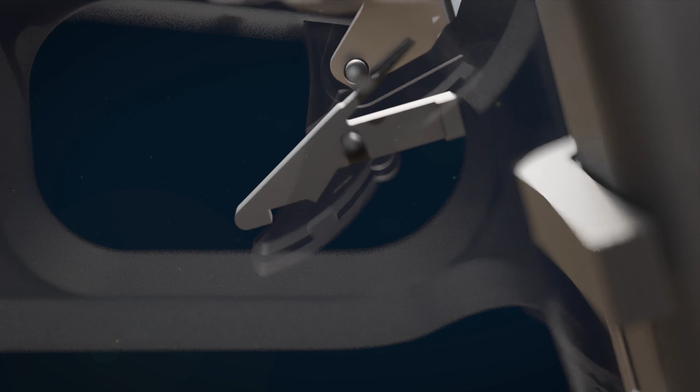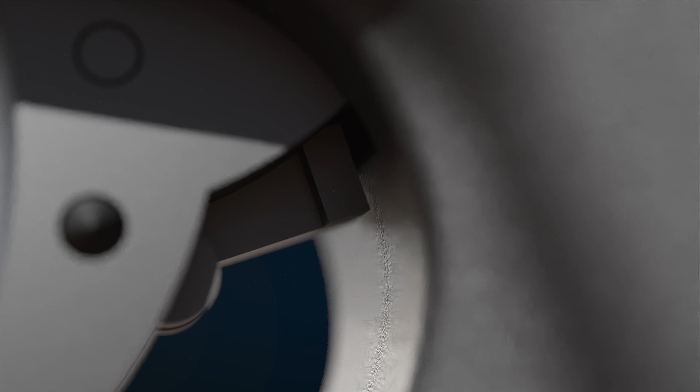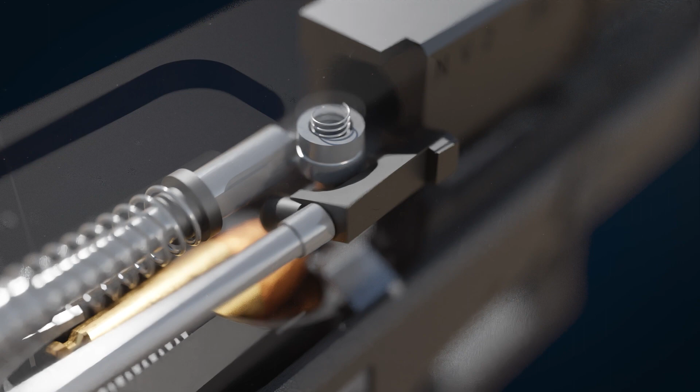Safety is paramount. The Glock features a trigger safety, a small lever incorporated into the trigger itself. This lever must be depressed to allow the trigger to move rearward, ensuring the trigger doesn't move without a deliberate finger push. Additionally, there's the firing pin safety. This is a solid pin that blocks the firing pin from moving forward. When the trigger is pulled, this safety is disengaged, allowing the firing pin to move.

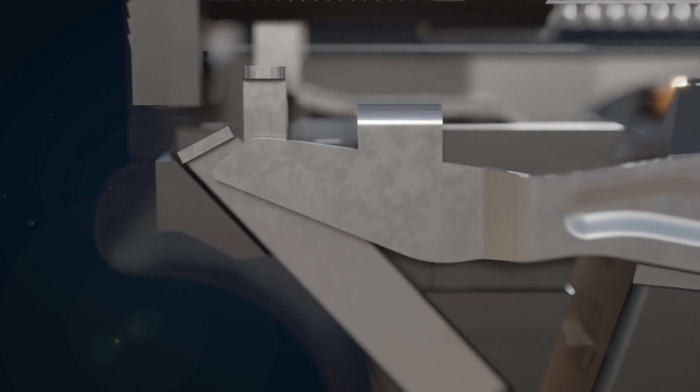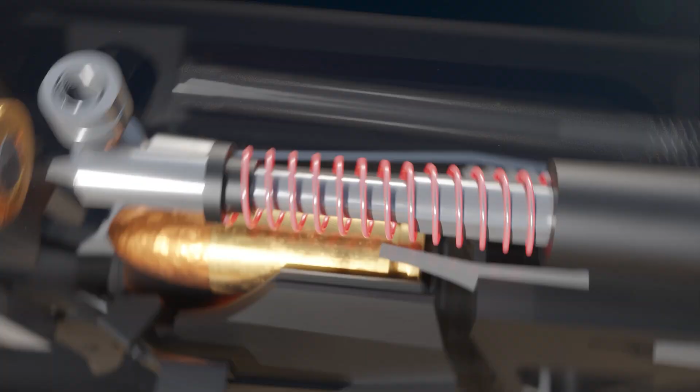The heart of the Glock's firing sequence lies in its trigger mechanism. As the trigger is pulled, the trigger bar, connected directly to the trigger, begins its journey. The trigger bar engages and pulls the firing pin backward, compressing the firing pin spring. As the trigger continues its rearward motion, the trigger bar is guided by the connector, causing it to cam downward, releasing the firing pin. With the trigger bar disengaged, the compressed firing pin spring releases its energy, propelling the firing pin forward. The firing pin makes contact with the primer, a chemically sensitive compound.

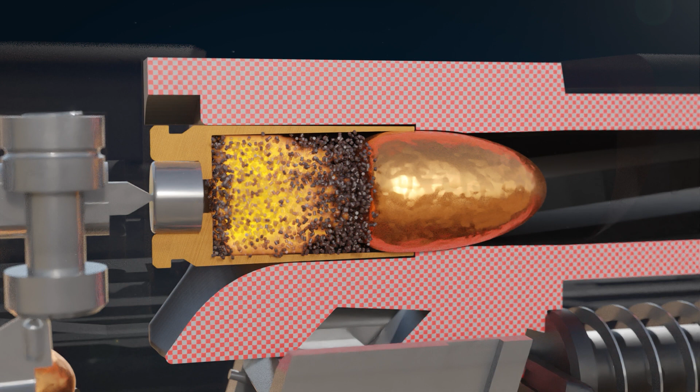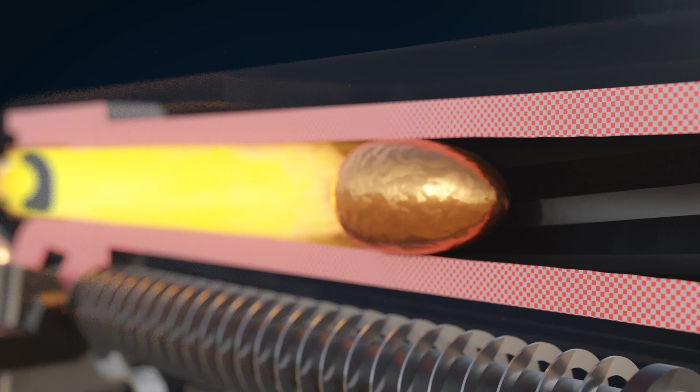Upon impact, the primer releases a small spark. This spark travels into the cartridge, reaching the gunpowder. The gunpowder, a specially formulated chemical compound, reacts to the spark by rapidly burning, creating an expanding gas. This sudden gas expansion exerts a force on the base of the bullet, propelling it forward with immense speed. As the bullet travels through the barrel, the unique polygonal rifling of the Glock's barrel imparts a spin to the bullet, stabilizing it and improving its accuracy.

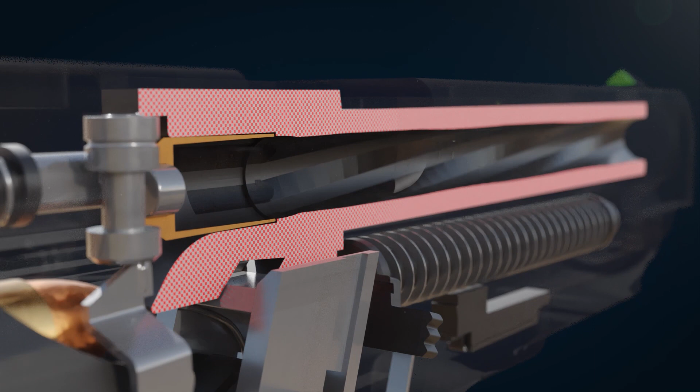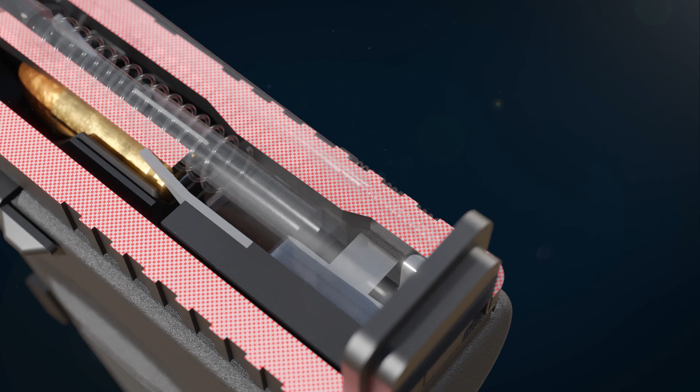The force of the bullet's exit drives the slide rearward. As it moves, the barrel tilts downward. The extractor, having gripped the rim of the spent casing, holds it in place. As the slide continues its rearward motion, the ejector strikes the base of the spent casing, flinging it out of the ejection port. As the slide retreats, a distinct feature on its inner surface comes into play. This specially designed protrusion on the slide makes contact with the connector hook, pushing it inward. This precise interaction releases the trigger bar, allowing it to rise. Elevated, the trigger bar now retains the firing pin, ensuring the Glock's safety by preventing any unintentional discharges.

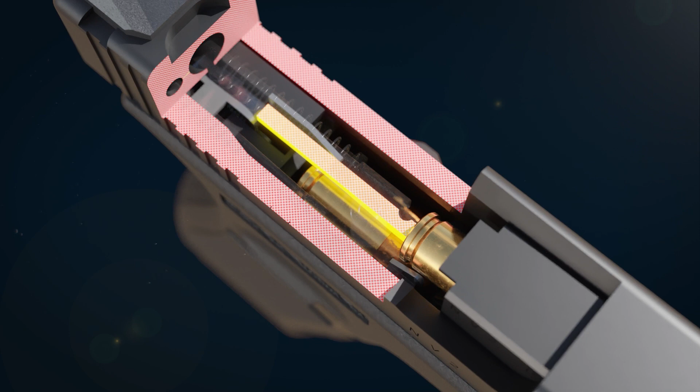Driven by the tension of the recoil spring, the slide moves forward. Subsequently, the magazine's internal mechanism lifts the next round into position. The slide's forward motion strips the next round from the magazine, using the slide's internal rails as connection points, and chambers it. As this happens, the barrel tilts upward slightly. When the trigger is released, the connector gracefully returns to its original position. This movement facilitates the upward path of the trigger bar, resetting the firing mechanism and priming the Glock for the subsequent shot.

Before we conclude, let's touch upon the Glock's renowned safety features. We've discussed the trigger safety and the firing pin safety, but there's another crucial safety mechanism, the drop safety. The Glock's drop safety is a testament to its commitment to user safety. The trigger bar is held in place by a housing, preventing any unintentional downward movement. Only when the trigger is deliberately pulled does the housing allow the trigger bar to move downward, releasing the firing pin. This design ensures that even if the Glock is accidentally dropped, it won't fire.

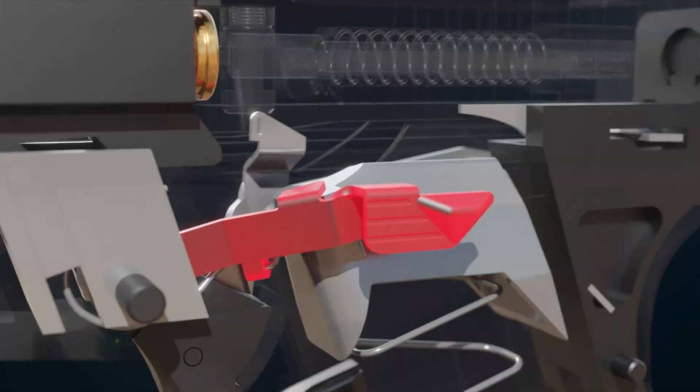Another key component is the slide lock lever. Once the last round is fired and the magazine is empty, the magazine follower engages the slide lock lever, ensuring it locks the slide in its rearward position, signaling to the shooter that the firearm is empty and needs reloading.